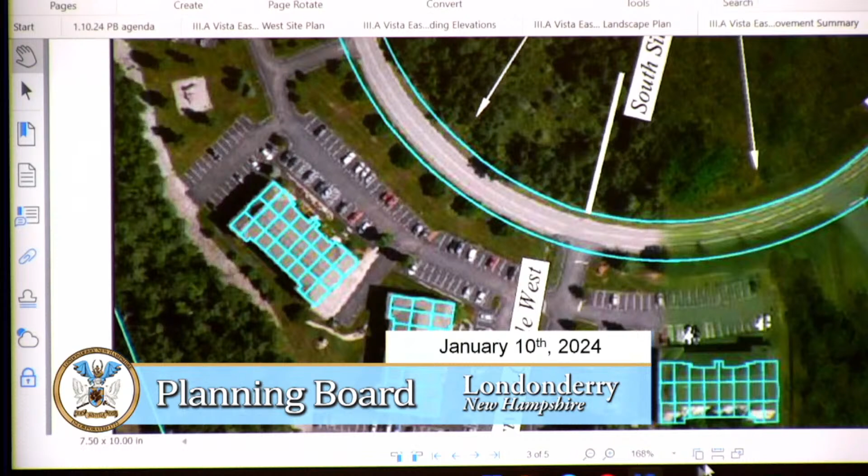I had one other question. If you could go to the picture, Kelly, showing Vista Ridge Drive with Crestview coming into it - it's in this packet, I think the last picture in the packet. Right there, right there. So I was up there today, and one comment is there's a berm that's right here.

And if that came down, I think your problem goes away. That needs to come down - that would have to be part of it in order to get the sight distance. Not only are we taking that grade down, we've got to clear a lot of the trees right over, almost to that culvert that it passes under. Okay, as long as the berm is coming down, I think the problem pretty much goes away.

So if you're planning on doing that, I'm good with that as well. That's already in the grading. Okay, great, thank you.

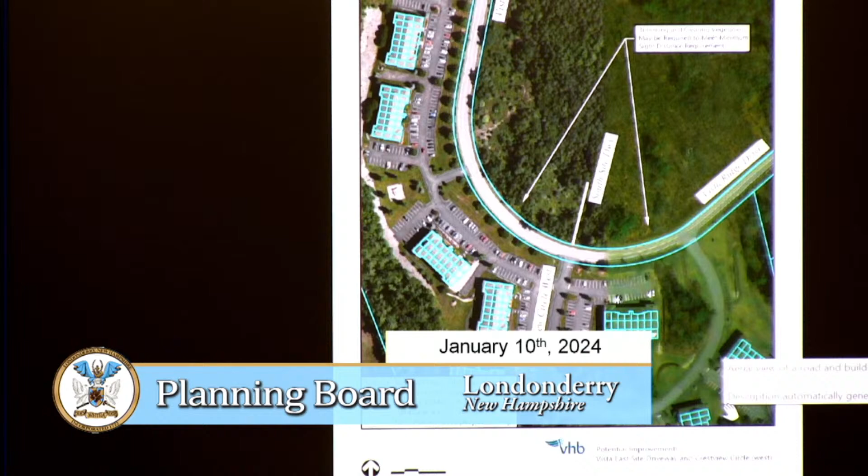Anything else to add? Nothing else unless the board has additional questions. Okay, I'll go to staff, then we'll go to the board for anything in addition, and then the public.

As Jason indicated, I believe the revised plans were just submitted this afternoon, so I have not reviewed any revised plans, just these attachments, and nothing verbal yet on some of the responses to the comments. Got it. So again, we want to put that caveat out there.

A couple of things, though - when Jason was talking about the landscaping that they added to the inside of Vista Ridge, you just need to be careful that we're not putting that in any slope easements or anything, so you need to look at that. So if he says there's 100 and it only ends up being 85 or whatever, we'll have to take a look at it.

I was gonna say, just keep them outside of the easement. Problem solved, they're outside of the easement if there's enough real estate out there. Just raising the flag, 'cause I think if there's anything that happens...

We could make it a condition of the plan if we're gonna conditionally approve it, since you said you hadn't reviewed the full plans and everything. So they would have to satisfy you before the plan could be signed.

Correct. The other item I had jotted down from last month, Jason, how are you making out with Manchester Water on those improvements? Is there any additional work as far as the exterior of that pump station? No, it's replacement of 2 pumps and the fire suppression pump.

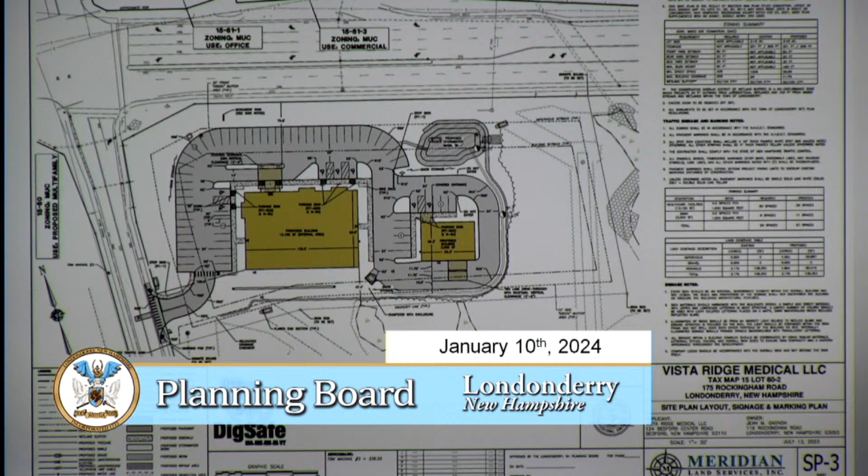No problem. Approved. The other concerns were site circulation, more specifically fire access, and then ambulance use of the drop-off area. So that brings us to the phasing.

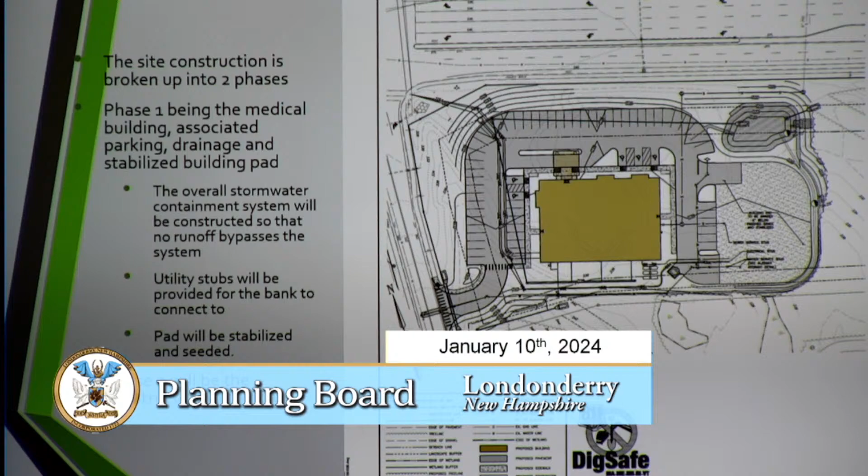To be upfront, we do think that these two projects are going to be built in unison together. We do not have a tenant for the bank right now, and that is why it's phased, in case that tenant isn't acquired in time to actually build the building. There's the opportunity to divide this project up into two phases: phase one and phase two being the bank.

The proposed phase one has all the utilities stubbed beyond the pavement area. It has the stormwater containment berm and swale going to the stormwater basin. So that way, when phase one is complete, the site will be stabilized and the utilities will be stubbed to the site, which means there will be no disturbance of the actual pavement area.

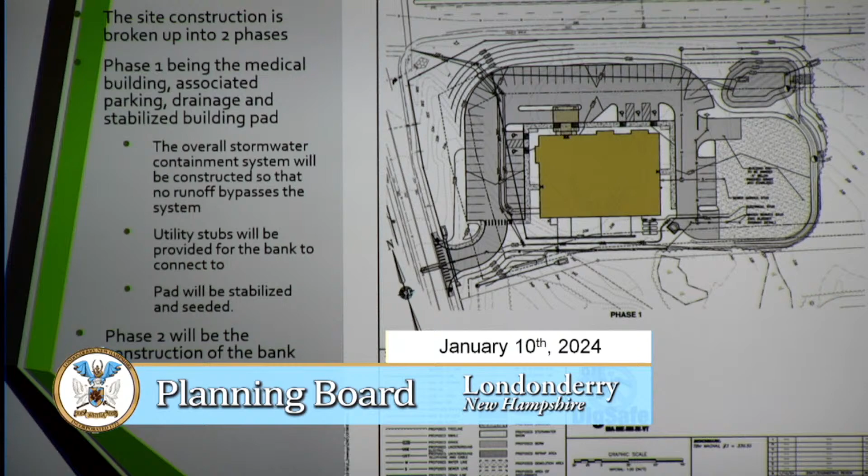While I recognize that area is small and confined, the majority of the site work is related to the actual construction of the building. So the larger equipment required is only for the footings there, and then some minor trenching for the utility connections. We believe there's plenty of area there to actually construct the building. Yes, there will be some inconveniences to the uses of the medical building at that time, but there is appropriate room over there to construct that 3,000 square foot building.

That brings us to the colors. This was provided by the architect here, listing out what the shingles will be, what the clapboard will be, what the bricks will be, and then all of the other architectural features. But I think the samples do give you the best idea of what it is.

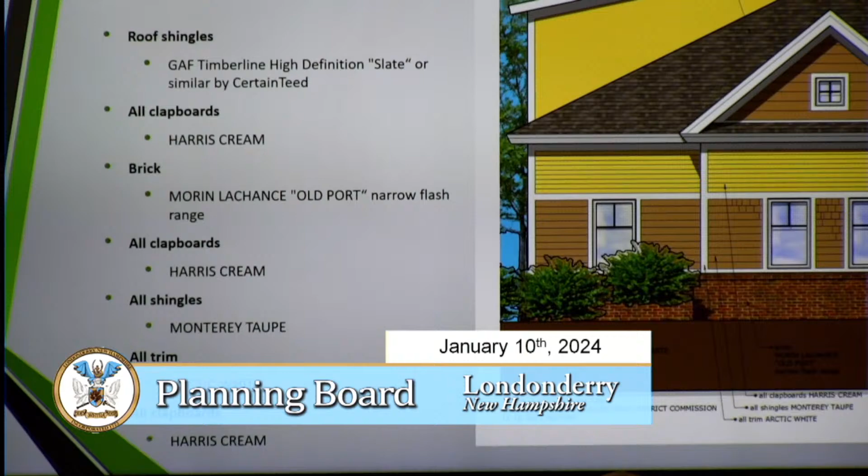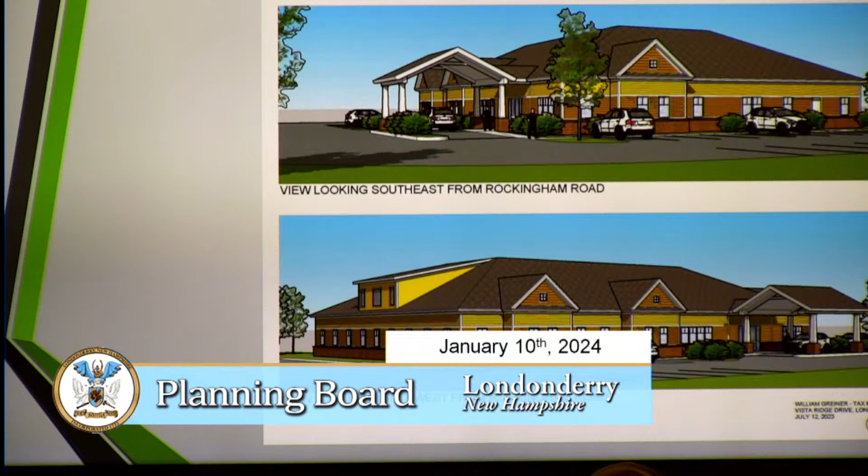Additionally, we've been before the Heritage Commission twice related to the signage, the architecture, and the landscaping, and the ConCom regarding the landscaping, which I know was one of the other items. This is a code compliant plan with landscaping. We feel it's the appropriate landscaping plan given the site, still having visibility of the site but breaking up the building appropriately. And these are the renderings that you've all seen before.

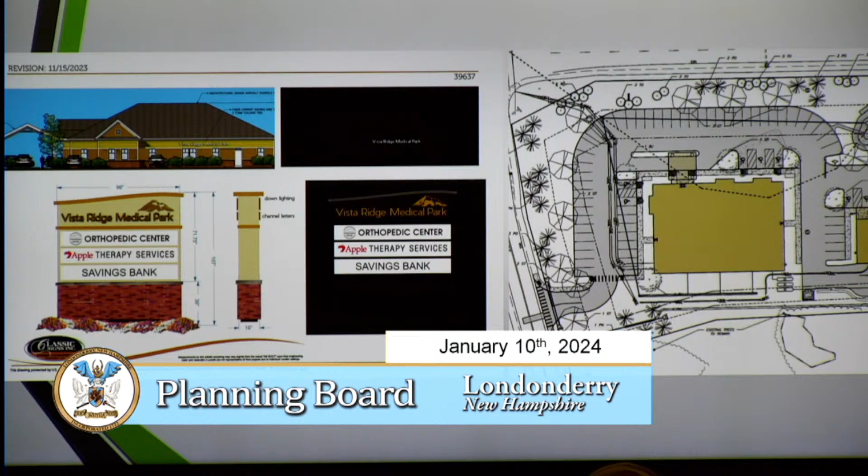Here's the signage with the landscaping plan, and this is where I say it does break up the building, but it still gives the site some visibility through the larger trees.

That brings us to fire comments. Since the last meeting, we had correspondence from the fire chief. Those concerns were related to the distance from the fire hydrants to the fire department connections, which can't be more than 100 feet. This exhibit isn't zoomed in enough to really see, but there are leaders between the fire hydrants and the fire department connection for the sprinklers, and that is less than 100 feet.

We've also added notes to the plan in case those fire department connections to the sprinkler system change, saying it can't be more than 100 feet as the hose lays, just to make sure it doesn't go out of compliance. Additional comments related to fire are making sure the drop-off canopy has a clearance height of 13 feet 6 inches, and I believe 13 feet for the bank canopy. We've added the appropriate notes to the plan to make sure that's clear.

Fire truck access: this is the turning movement of a fire truck accessing the site through phase one. As you can see, phase one builds a little longer of a stub than would typically be necessary, but that stub allows the fire truck to make a turning maneuver. Then we move on to the fire truck turning movements through the site during completion, and it's able to circle the bank through the bypass lane.

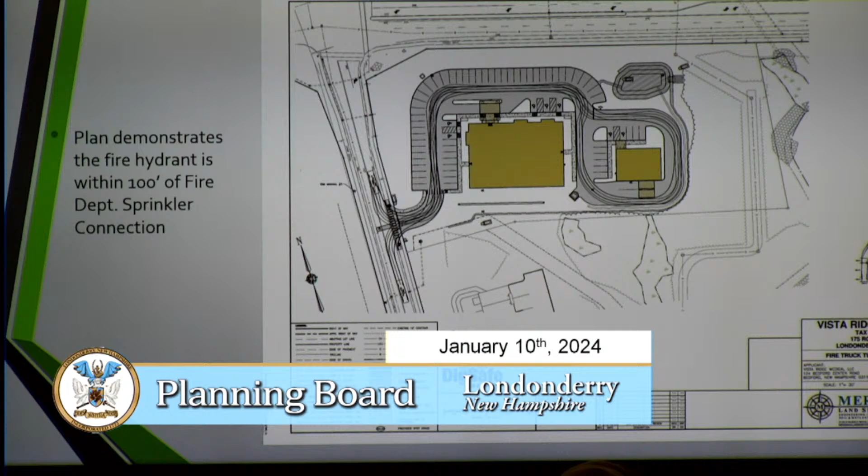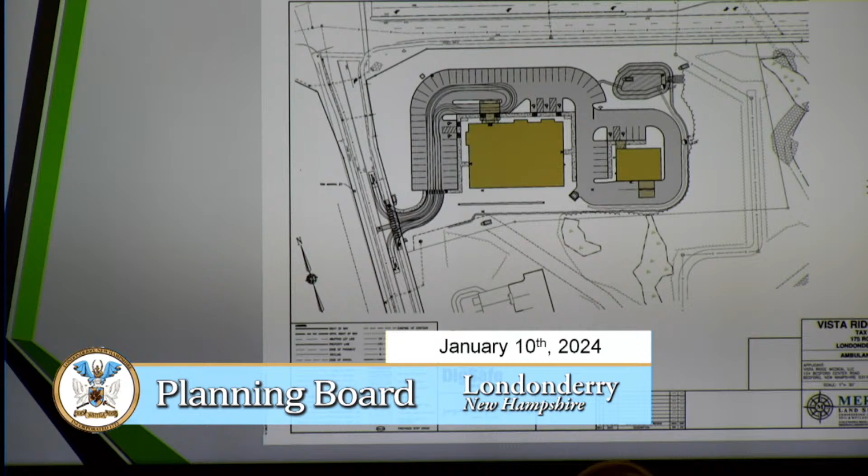Another comment was whether an ambulance can drop off at the drop-off area and be able to make essentially a U-turn out. This is the turning movement for an ambulance utilizing the drop-off area.

The rest of my slides are all previous slides that were presented to you last time. In respect to the board's time, I can go through them if you have further questions, or I can leave it to Jason to address the traffic concerns.

Just have a question, Mr. Chair. So on your drawing for the fire trucks here, obviously we got a 10-foot width - what is the length of the fire truck in the design you have? I don't have it in front of me, but if I'm able to zoom in on there, I don't know if you can see it on the screen.

It just says MLS Fire Custom on it. But you wouldn't have - do you have an answer to that or not? I don't have an answer right in front of me, but if we zoom in on that, if I can pull it up on my computer - yeah, I can probably go zoom in.

I think those curves are too narrow. It would be on the bottom right there, on that corner. To the right, okay, and then go straight up. And zoom in on that curve.

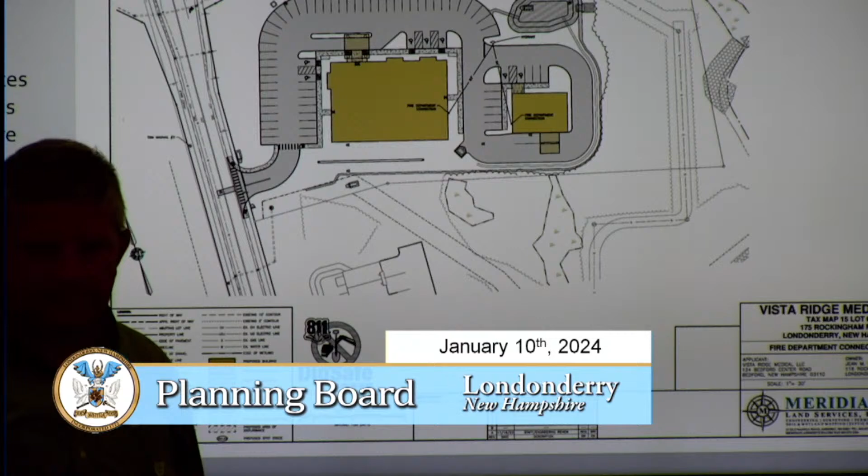So that was actually the worst condition. What I did was, since the right turn movements can turn right on red and have an overlap to run when the main line left turns are going, the longest queues are in the shared left-through lane. So those numbers I gave you are the longest queues, and that included the potential development that was already previously evaluated here.

Which is going to be less in the morning and less on a Saturday - it could be a little bit more during the weekday evening. But out of the three time periods, the longest queue was during the weekday evening, which was 72 feet. So we still have a lot of wiggle room until we get to 245 at the driveway.

Even though that 100 is kind of the rule of thumb, you always have to take a look at what's happening. Again, DOT might say they don't care because it's our roads - but it's going to be your problem.

To support what John is saying, the state can come back and say, hey town, you approved this project, and you're approving all these other developments in the area, adding all this traffic to our state highway system - what are you going to do for improvements? They have every right to do that. That's why John has been going through the same process for each developer in the area, to make sure we're following the same process.

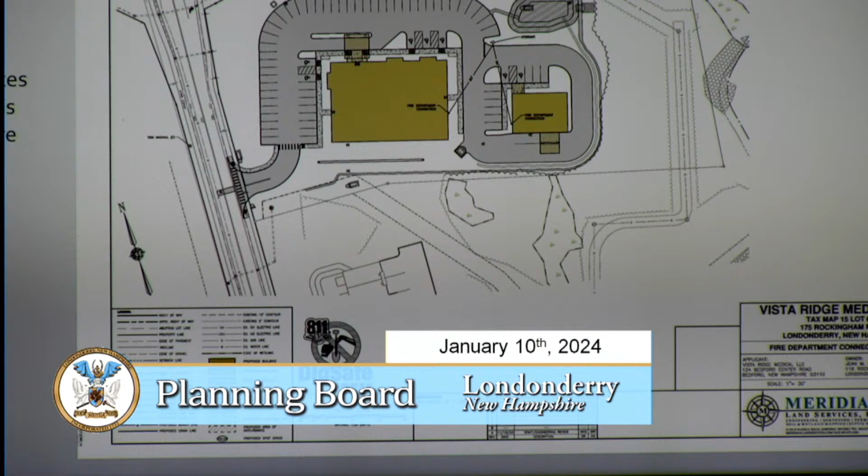And the reason I bring up the Rhino Warehouse and the Vista Ridge Residential is because I worked on both of those studies, so we are following the exact same process that John has required. It doesn't matter who the applicant is, doesn't matter who the engineer is - it's the same exact process, making sure we're providing all the information to the town so the town can provide that to the state.

And if the state has any questions, they're going to go back to John and ask what are you doing. John needs to have that within any conditional approval that says the state needs to sign off on it. If not, you have the ability to come back to us and say we need X, Y, or Z. So it's a standard - it's nothing I dreamt up, trust me. John didn't make that up. Didn't think you did.

Just as a reminder, the board granted a waiver regarding the bank renderings. So what that means is that the applicant has to come back to Heritage and the board at the time that they are ready to present those renderings.

Outside of that, I'm all set. And you're all set for right now, John? I'm sorry? You're all set, okay. Go through the board and then the public. So I'll start with Roger.

Everything looks pretty good to me. I'm just still nervous about those turning radiuses, and that's it. Well, Brian's keeping a watchful eye on that, so.